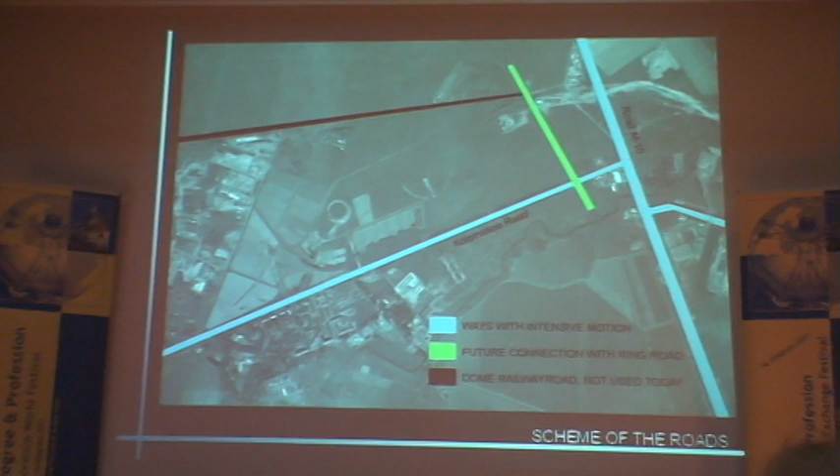The northeastern border of the area is an important federal route which connects Moscow and St. Petersburg. One of the borders of the area is also very important. It is called Kolpinskaya Highway and connects the federal road with Pushkin, and most of the traffic will go along it. It will be a very noisy road, and we had to take this into consideration while making our project, and design a special type of noise-protecting buildings to be erected along this road.

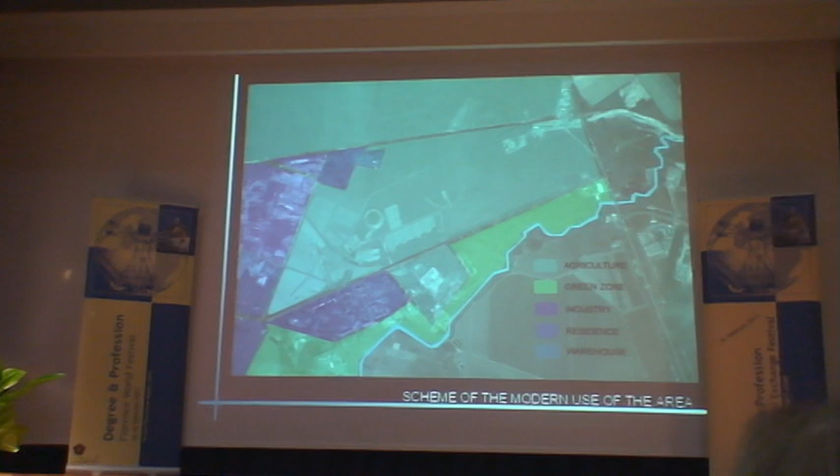We researched the contemporary situation of the area and found that most of it is occupied by agriculture, and around the area there is no developed social infrastructure. We had to take this into account and make projects of educational, health, trade and recreation facilities in the area.

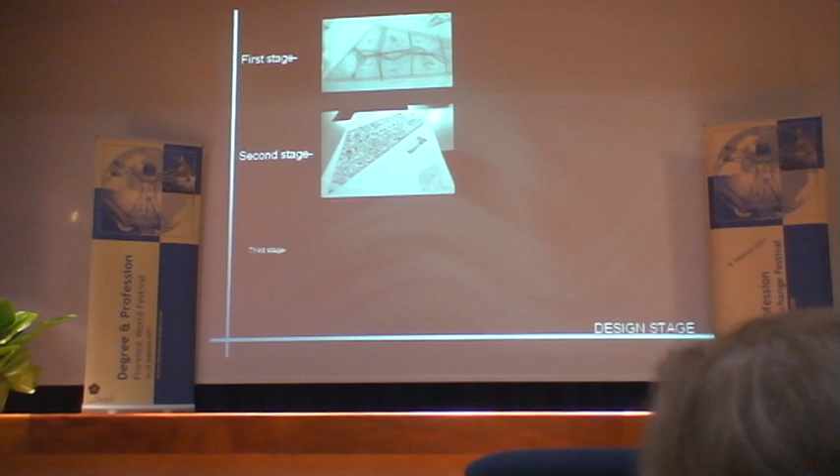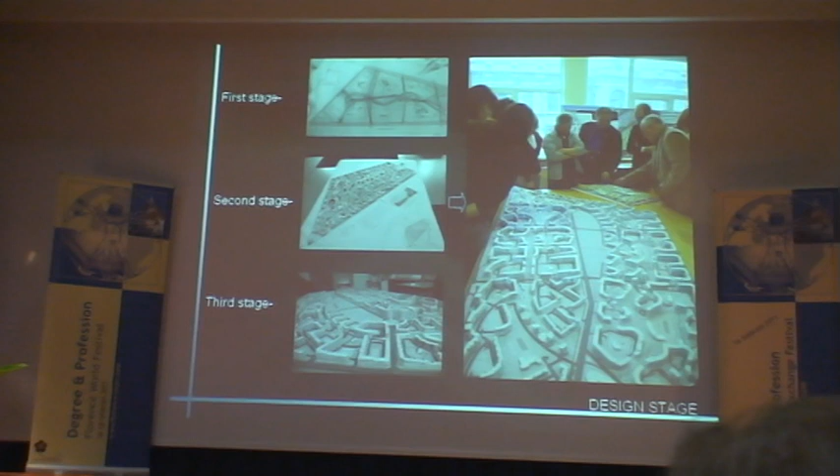That was how the work was organized. It consisted of 3 stages. Students were divided into groups of 5 to 8 people. Each group made the general idea of the project, lined the roads, and created the general zones. Then each student made a detailed project of one part of the area, designing it themselves. During the 3rd stage, each student made a project of one of the buildings situated in their district.

And you can see the pictures of the work and the analysis of the topic.

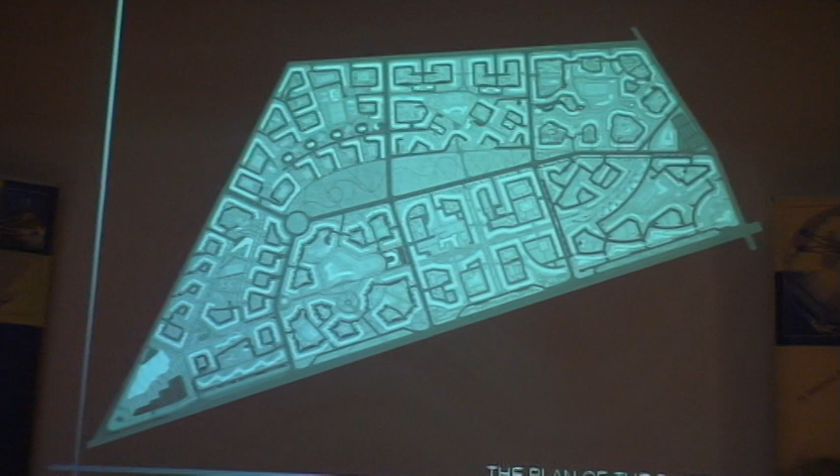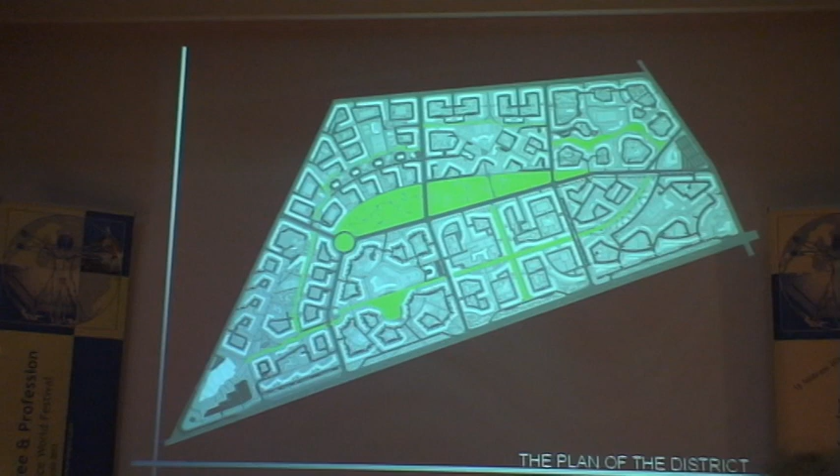Then Anastasia will continue. Our area consists of 7 districts. It was a place without developed infrastructure and a recreation zone, so we created a large park in the center of the district, and each district has access to it. The districts are also connected by a chain of pedestrian boulevards.

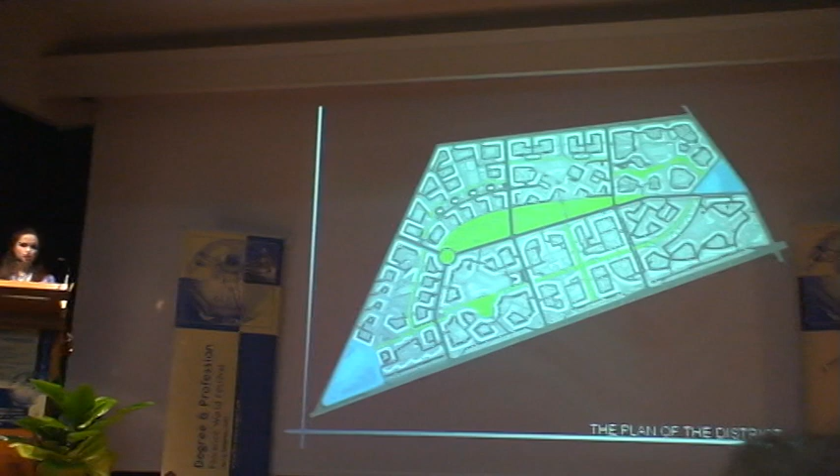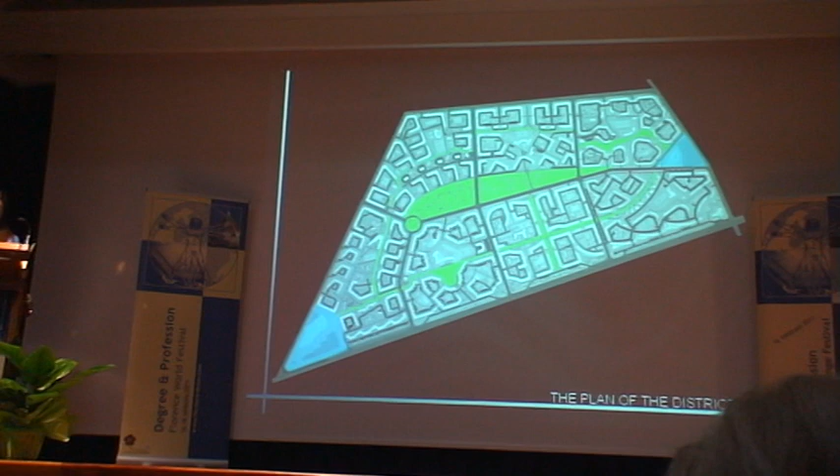There are 2 social zones located in the area. One zone is close to the road towards St. Petersburg, and the second is on the Kolpinskaya highway on the side of Pushkin. It's very convenient because people coming from both directions can visit the social zone before entering the district.

Developing the Slavyanka project, we aspired to create comfortable conditions for the future inhabitants. Slavyanka is an independent small city with its own internal life.

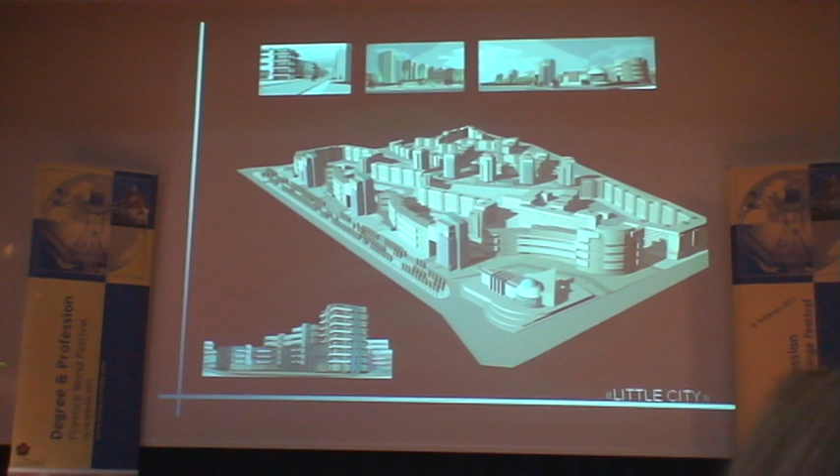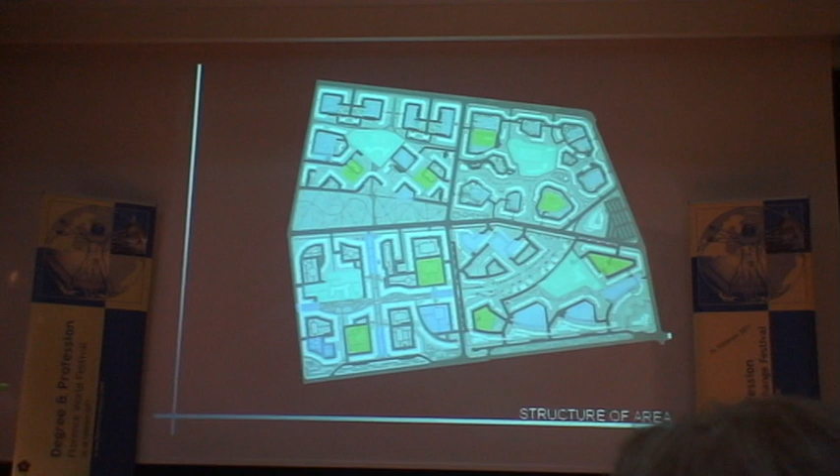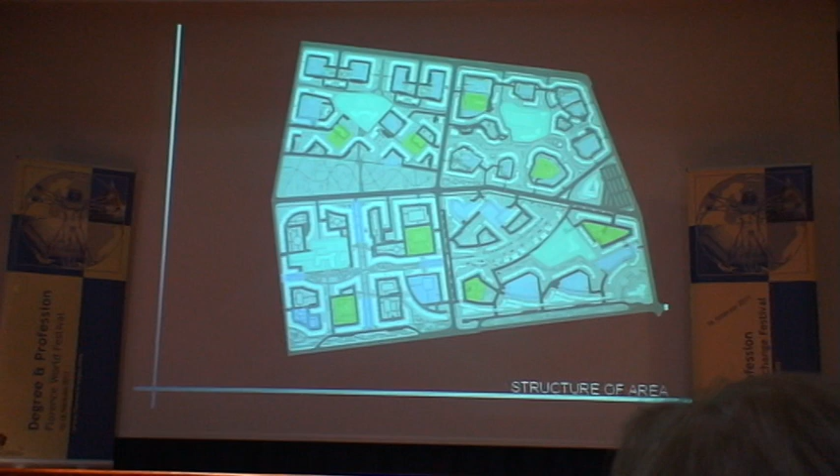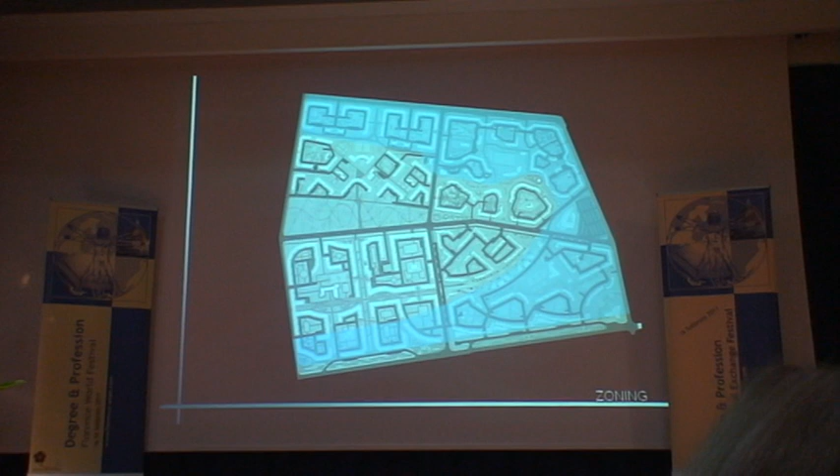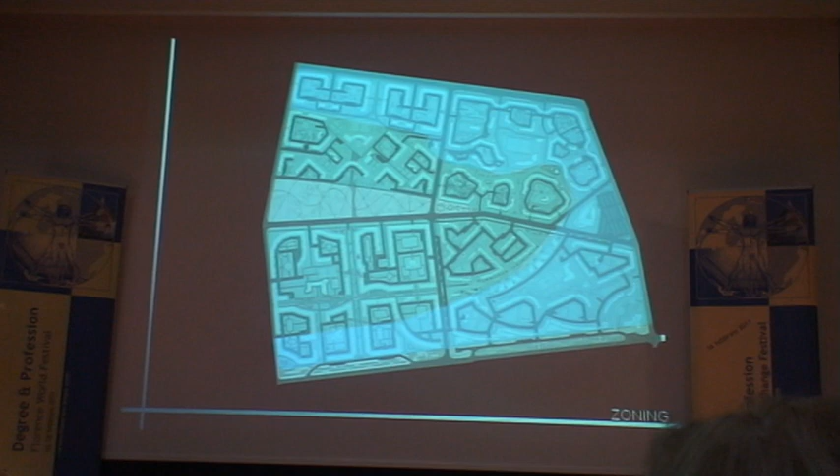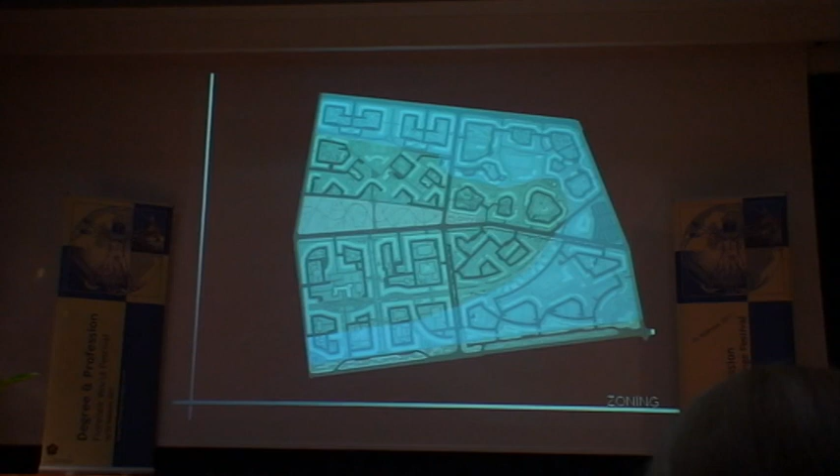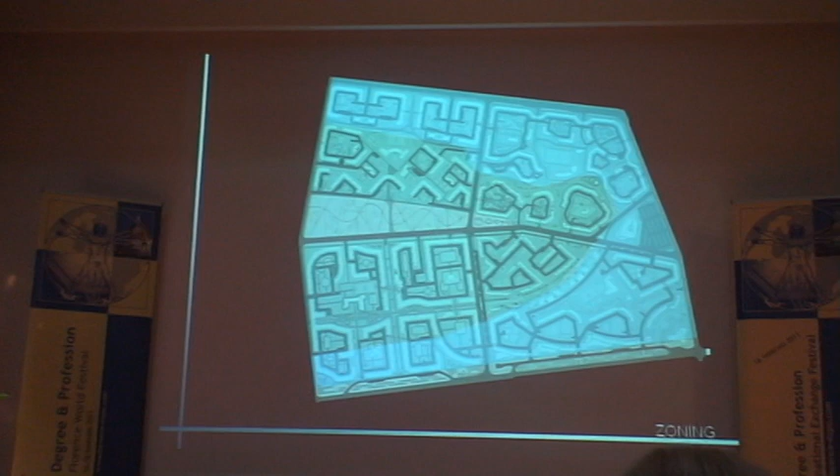A building in the districts is formed in 2 stories. The first story consists of houses of 10-12 floors along Kolpinskaya highway and other noisy roads, and the second consists of houses of average 7 floors. This planning solves several problems: first, it defends the district from road noise; second, it forms a picturesque line along Kolpinskaya highway; and third, the lower houses leading to the park don't block the view for other buildings.

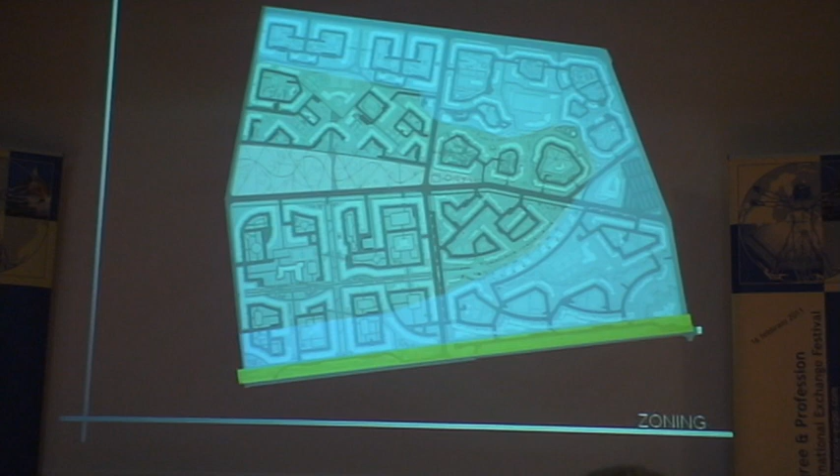To improve protection from noise along the highway, we use 4 lines of trees, and the house design will further help solve this problem. Elizaveta, continue.

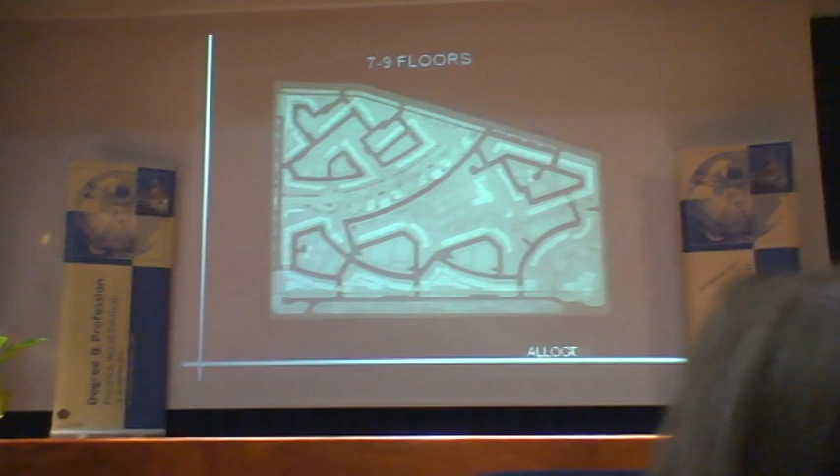Part 3, houses. One of the 7-9-story buildings is located along the main pedestrian street of the quarter, which leads to the shopping center. This house begins the street and is its main dominant feature. The main features of this house are the varying number of stories, striking geometric forms, and a clear structure.

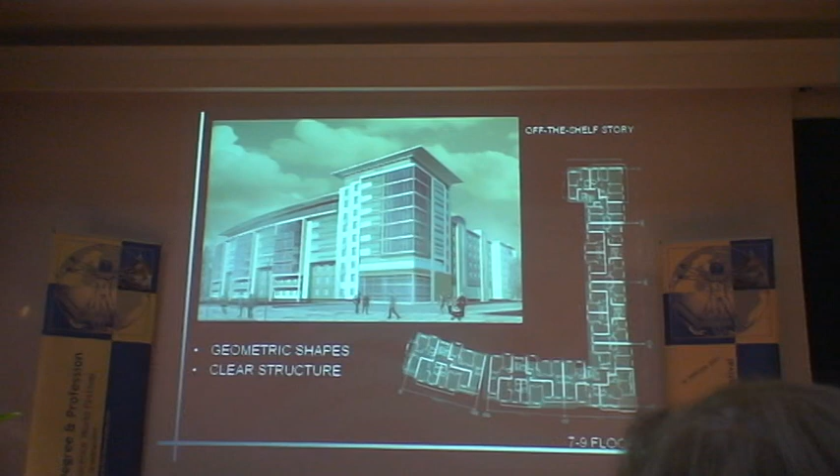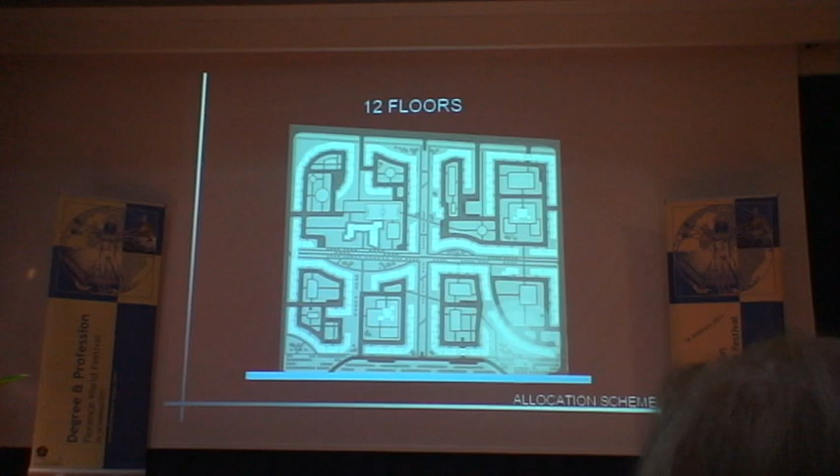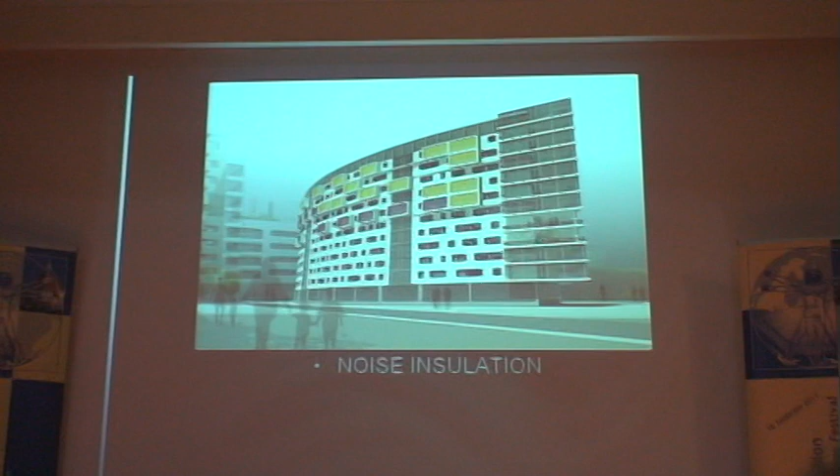The house represented here is a 12-story building located on a noisy street. Due to its size and location, it provides noise insulation for the interior space. The features of this house are the placement of balconies only in the upper part of the building, which allows for seamless glazing below.

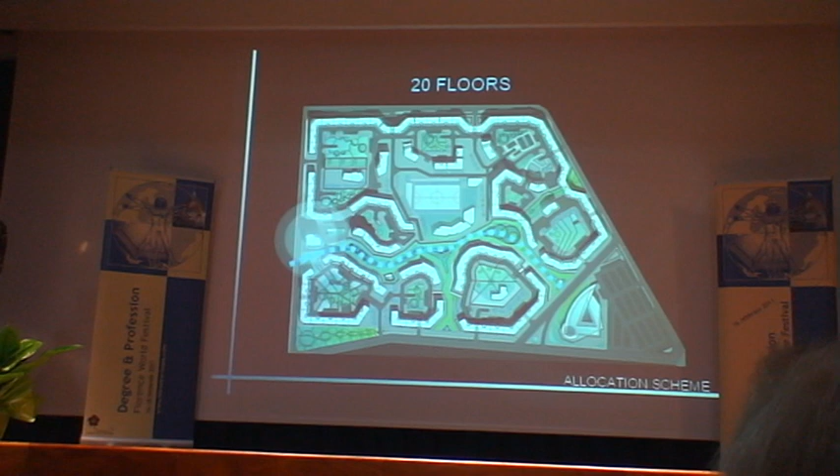A striking example of the high-rise building development is located on the main pedestrian street of the quarter. It is a symbol of the developing area. The house grows from the earth's surface, forming shapes like stone trees and enhancing the effect of the historical context.

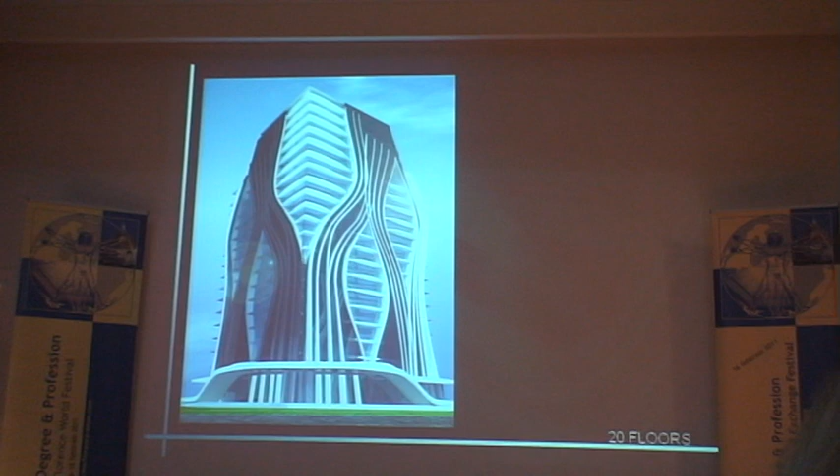If you consider the whole building as you approach roads and highways, it becomes clear geometric shapes, able to emphasize the transformation of form, combining a clear external model with the building and smooth curvatures of form.